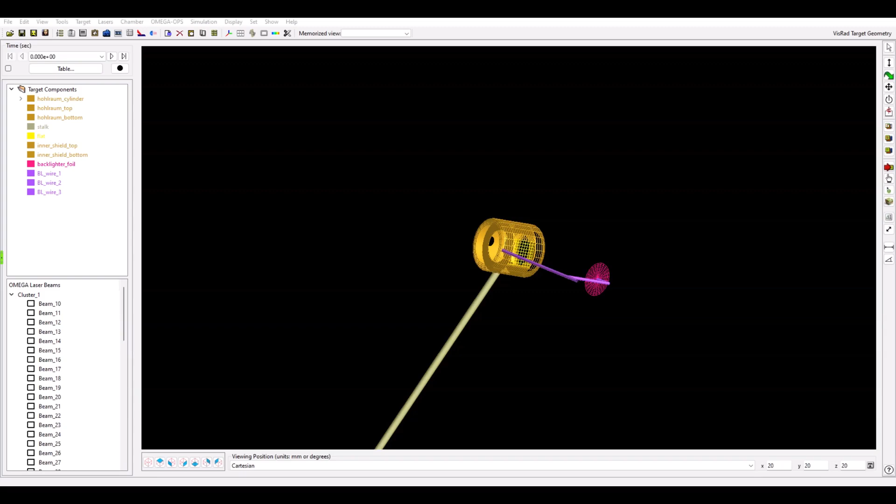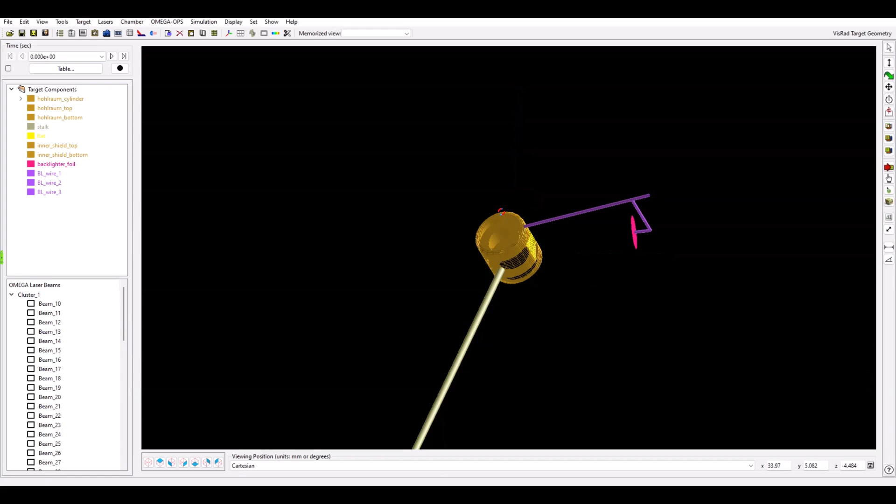Now, before we start the build process, let's take a quick look at the target system we'll be building. If you have a history with inertial fusion experiments, I'm sure you'll recognize this setup. But for those of you who are new, this center chamber we see here is what's known as a hohlraum. Hohlraums are a common structure used in inertial fusion and high energy density physics experiments. Their purpose is to essentially convert laser energy into X-rays, which will indirectly heat the contents of the hohlraum.

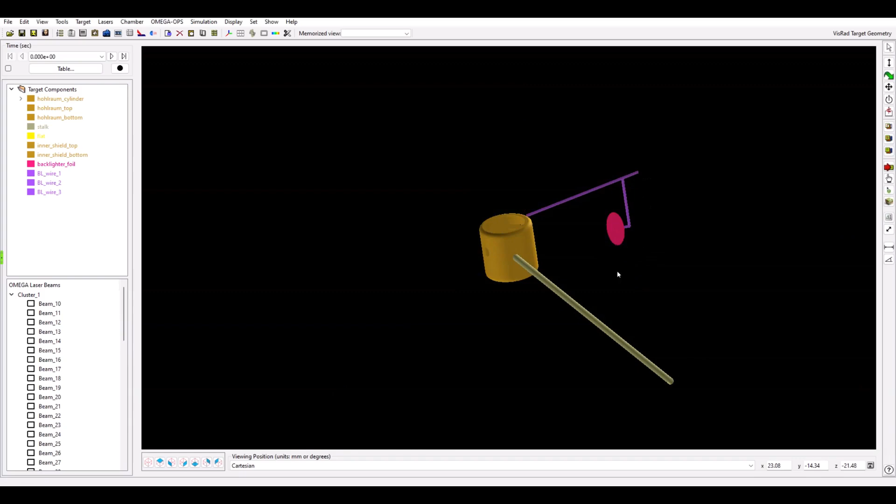Now, to highlight a few things, let's switch over to the solid frame view. That's the third viewing option over here to the right. This will just make all of our wireframes nice and solid and opaque. So when we look at this target system, we can see this wire jutting out with this disc connected to the wire, which is aimed at some kind of square and a hole. So what's going on here?

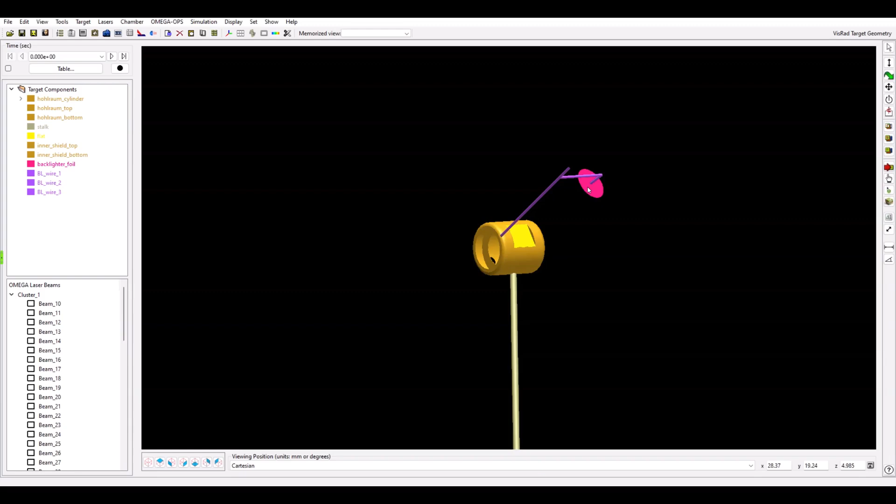Well, the square packet we see here is actually our material sample of interest. This is what our hohlraum is set up to heat. The disk in front of our sample material is the backlighter, which will also be heated by lasers to produce X-rays. These X-rays will hit our heated sample and then can be observed through this diagnostic hole on the other side of the hohlraum. This would let experimentalists get different opacity information on our sample material.

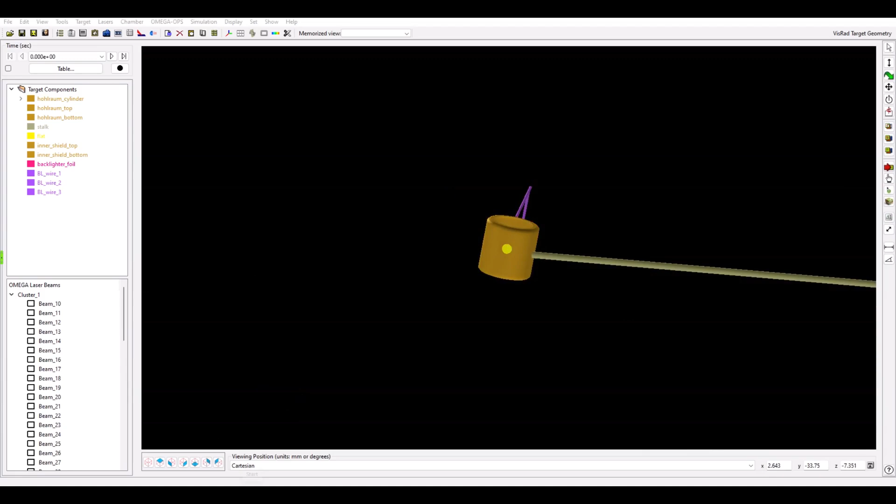The key thing to notice here is that the diagnostic hole, our sample material, and the backlighter all need to line up along a single line of sight. We can also see two washer-like structures on the inside of our hohlraum. These are basically just shields set up to help guarantee whatever signal reaches our diagnostic hole is coming from our sample and not elsewhere in the chamber or elsewhere in the hohlraum.

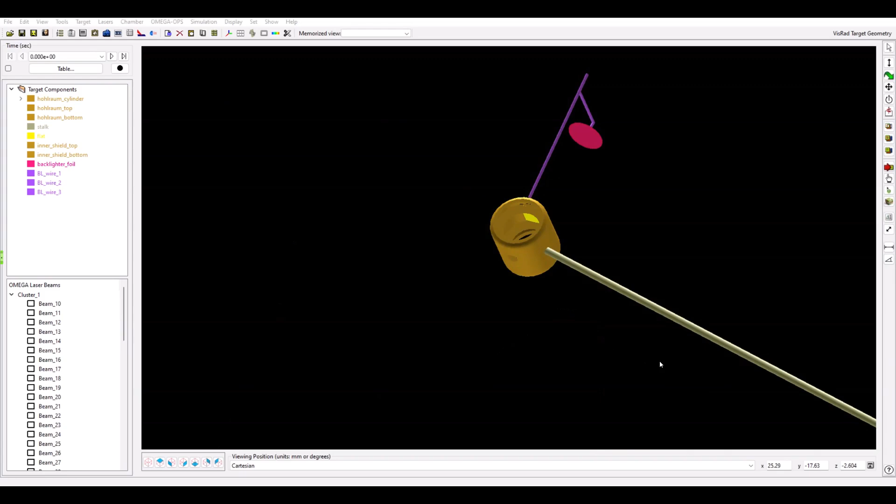Finally, we see a long cylinder connecting to our hohlraum. This cylinder is what's referred to as a stalk. Stalks are actually a fairly important component to designing a VisRad target system, and the topic of adding a stalk will be its own video later on. Now that we've gone over the end goal of our target system, it's time to open a fresh VisRad workspace, and we'll start the build process.

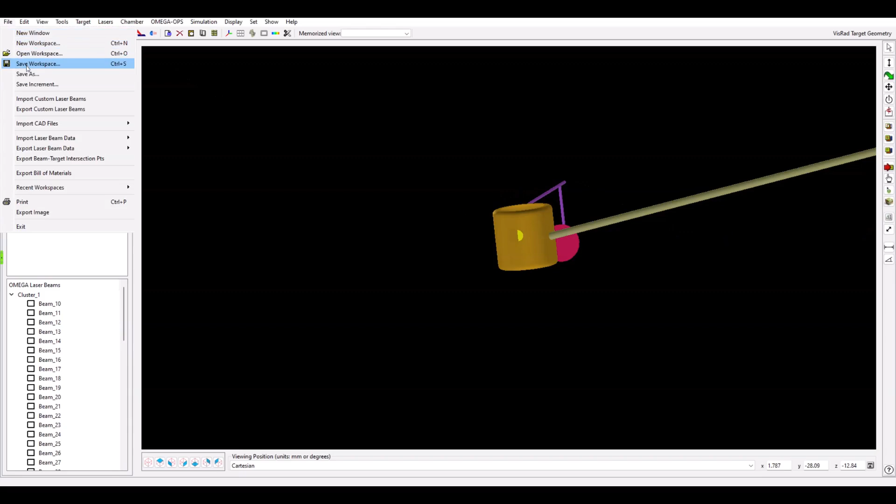With our fresh VisRad workspace, we'll need to select a target chamber. And for us, that's the Omega chamber. So let's start out with adding our hohlraum. Luckily for us, if we go to Target, Add Object, we can see cylindrical hohlraums are a primitive object that we can actually start with. After selecting the cylindrical hohlraum, the Object Parameters dialog will pop up. This is where we'll set our sizing and positioning information for our hohlraum.

First, let's go ahead and change our target object name to just hohlraum. And we can see that the first tab that our dialog opens to is the Position tab. This is where we'll set our object's position in the chamber as well as its orientation. For now, let's leave the default values here and come back to them in a moment. Let's go to the Size and Gridding tab. This second tab is where we can set up the dimensions of our hohlraum.

For this example, we'll be using a radius of 0.8, a length of 1.6, an LEH radius of 0.6, and an R corner of 0.1. These will basically just set our shaping parameters of our hohlraum to be a nice basic hohlraum shape for what we want. If we want to add more resolution to our object, we can choose to add more grid points over here to the right, but for now, the resolution here is totally fine.

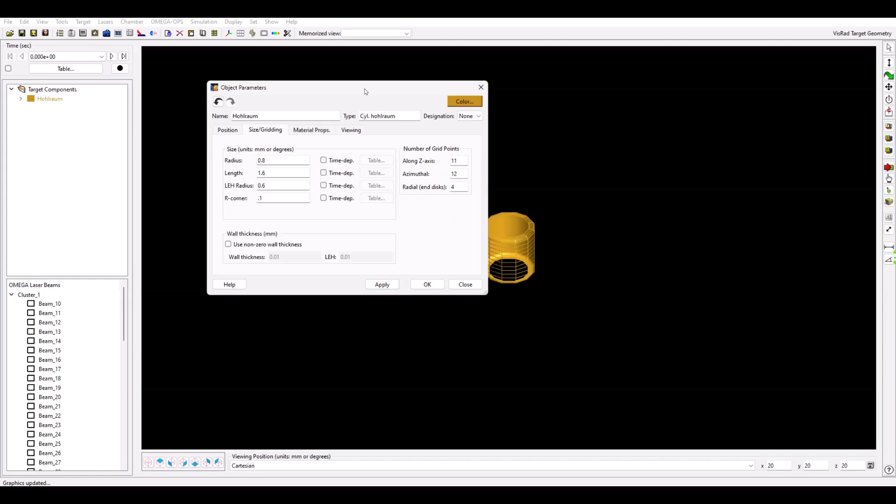If we click the Apply button and move our dialog a little bit, we can see our basic hohlraum appear in the target chamber viewer. Now that we have a properly shaped hohlraum, we can worry about its orientation.

Let's click back to the first tab, the Position tab, and now we'll need to choose a reference coordinate system. We have three options to choose from to define our reference coordinate system. The first one is the target chamber or mount. We can basically use the reference coordinate system of the target chamber or some preset mounting ports.

The second option is the target component option. This would be a drop-down of all the different target components. So we could use the reference system of, say, some cube up here to the right. We don't have any other target components in our system, so this is grayed out.

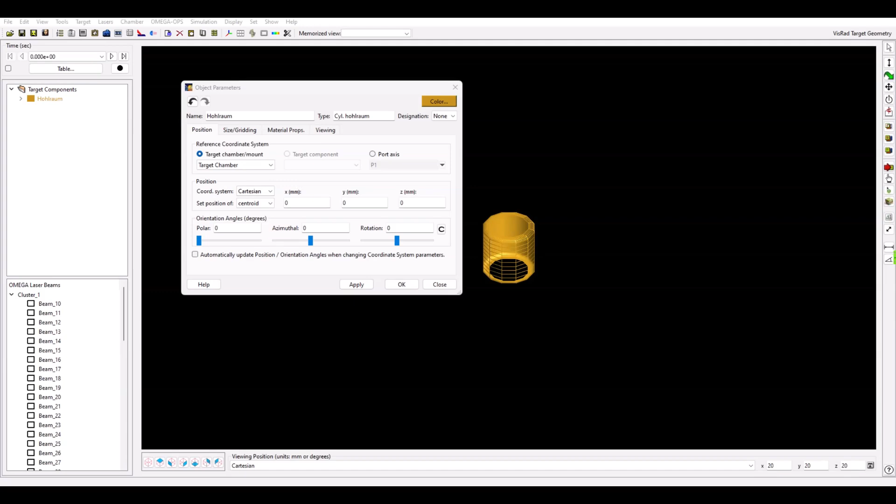And finally, the third option is the option to use a port-aligned coordinate system. Port refers to the diagnostic ports set up within a facility. Much like lasers, VisRad comes with these ports already modeled and set up. To see a list of these ports, we can go to View and then select the Port Positions dialog.

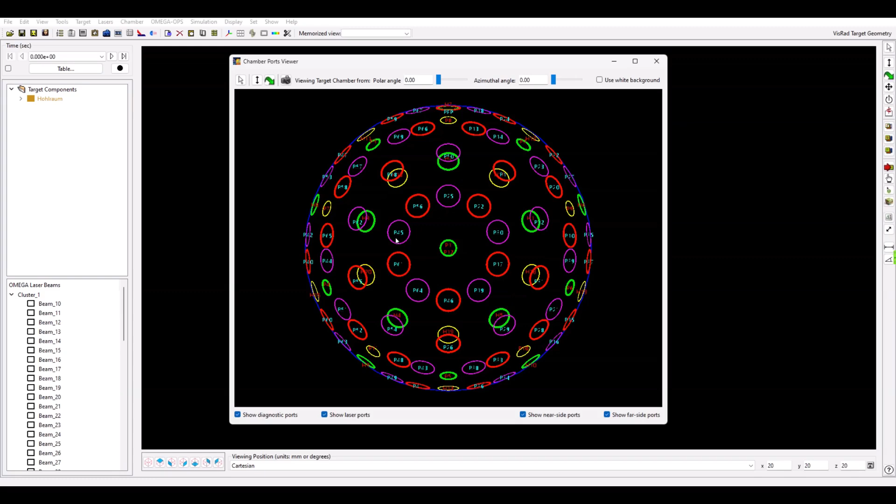This will give you the orientation of each port relative to the chamber, as well as their assignment at the facility. If you would like a visual, you can also open the port viewer and see how all these ports are laid out. For us, we'll go ahead and choose to align our hohlraum with port P6.

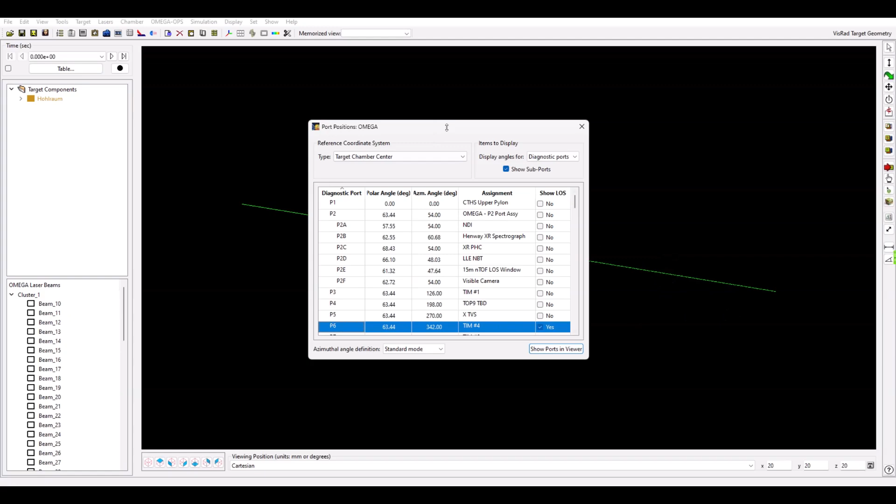To see the line of sight of this port, we can actually toggle it on and off over here with the Show Line of Sight option. You can see it pop up in the chamber behind us. I'll move this so we can see a little better. And now we want to adjust the orientation of our hohlraum so it lines up with this line of sight. I'll close this and go back to our hohlraum object information.

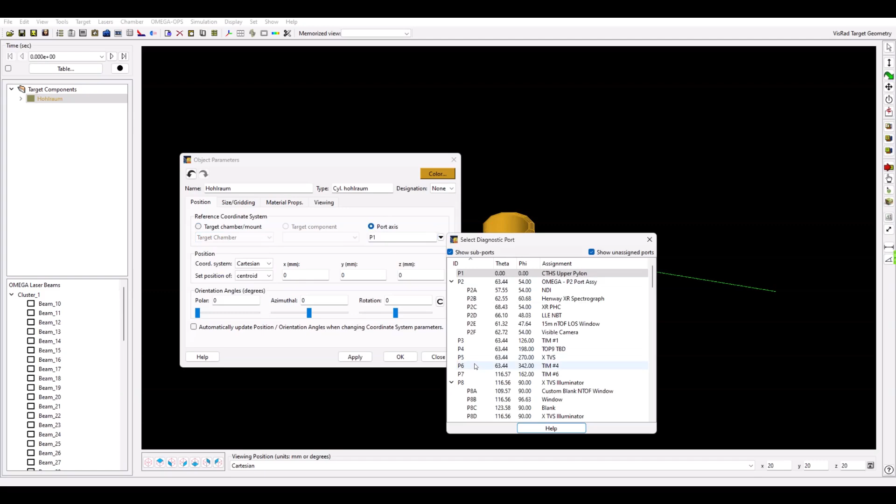And we have two options here. We can go to the port axis and choose P6. But also it's good to note that port P6 corresponds to TIM4, which is also in our first mounting reference coordinate system. So you can really use either. I'll just use the port P6 option over here because I'll refer to this as P6 quite a bit coming up. So now if we hit apply, we can see our hohlraum lines up perfectly with the port P6 line of sight.

The rest of the information in this object parameters dialog doesn't really need to be altered for us. This center section sets the centroid of our hohlraum, and we're okay with that being at the 0,0,0 point of our target chamber. And the third section down here sets the orientation angle offset.

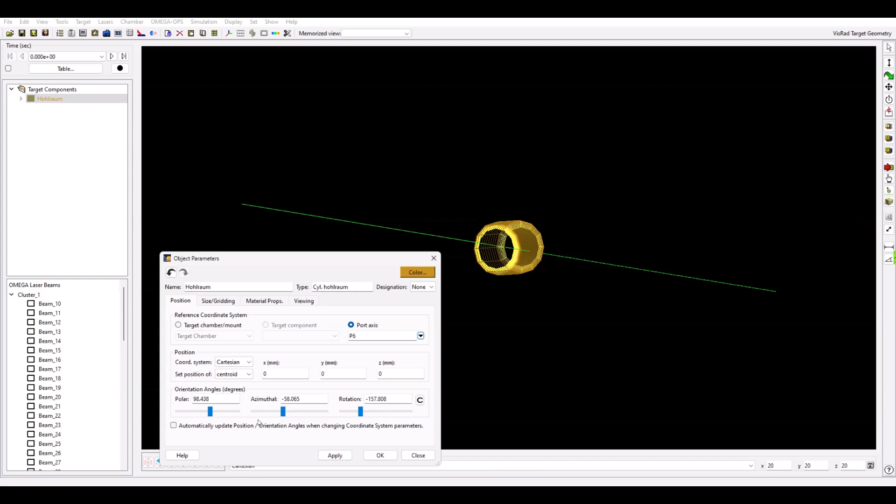We're already lined up with port P6, but if we want to deviate from that a little bit, we could rotate away from the default port P6 using these. But for us, we can just set them all to 0 because we're already lined up with port P6. And with that, our basic hohlraum is basically all done.

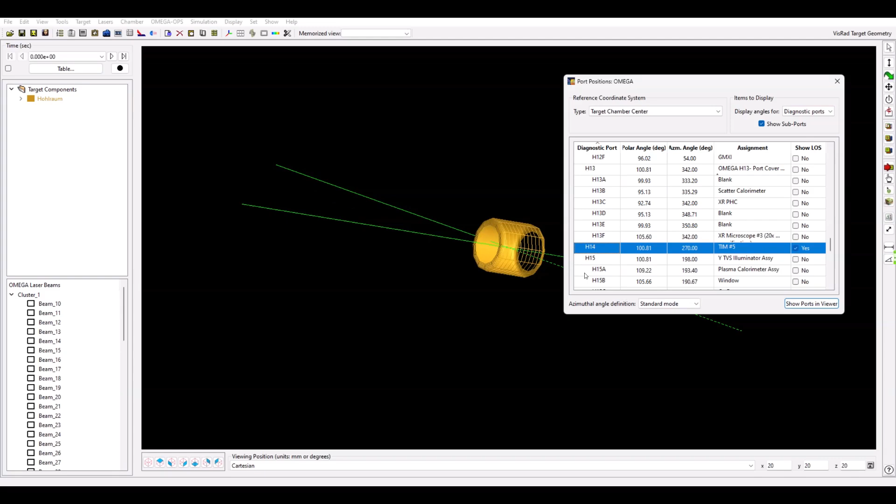Since we were just looking at ports and lines of sight, let's go ahead and set up our line of sight for the diagnostic hole, square sample material, and backlighter lineup that we just talked about. We'll go ahead and reopen the port positions. And for this setup, we want all three objects to line up with port H14 for our example. So we'll go ahead and turn on this line of sight as well. This will be the line of sight leading directly into the side of our hohlraum. I'll go ahead and close this again.

And now we can add the easiest of these three features, the backlighter. To do this, we'll go to Target, Add Object, and we're going to use a disk as a backlighter. We'll label this as backlighter. And now we'll go to the Size and Gridding tab and give this backlighter a radius of 0.5.

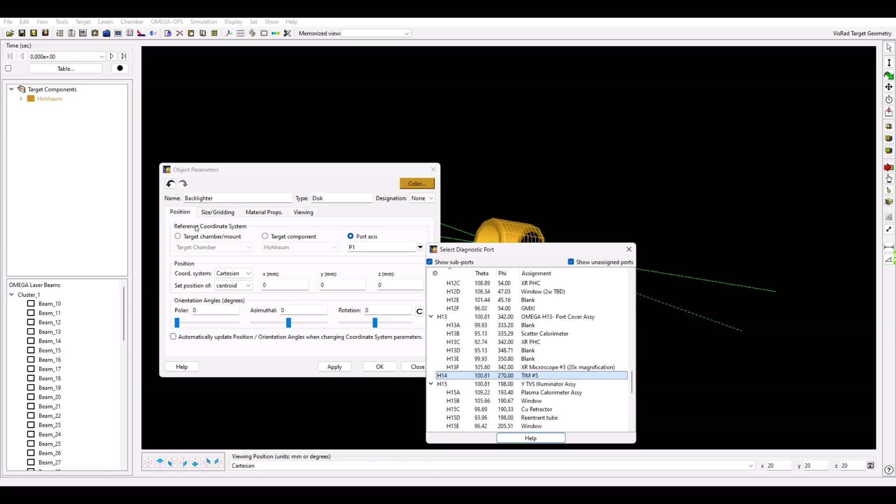Now, how do we line this backlighter up with our new line of sight? Well, let's go back to the Position tab and we can choose port H14 from our list of ports for our reference coordinate system. Just double click it. We can hit apply and we can see a disk appear at the center of our hohlraum. And we want to shift this a little bit down. So I'll set this to a Z value of negative 3.5, hit apply.

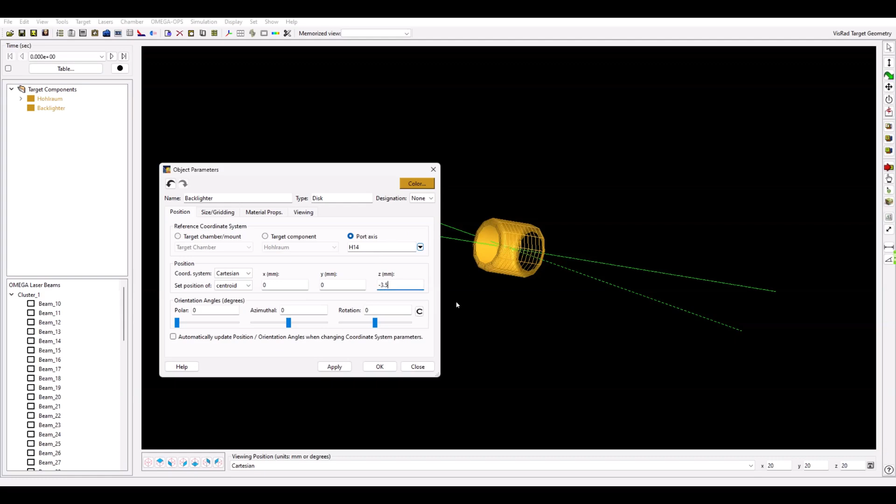And now we can see our backlighter is set down our H14 line of sight. And now we can go ahead and add our shields. To do that, we can just go to Target, Add Object, and choose a disk.

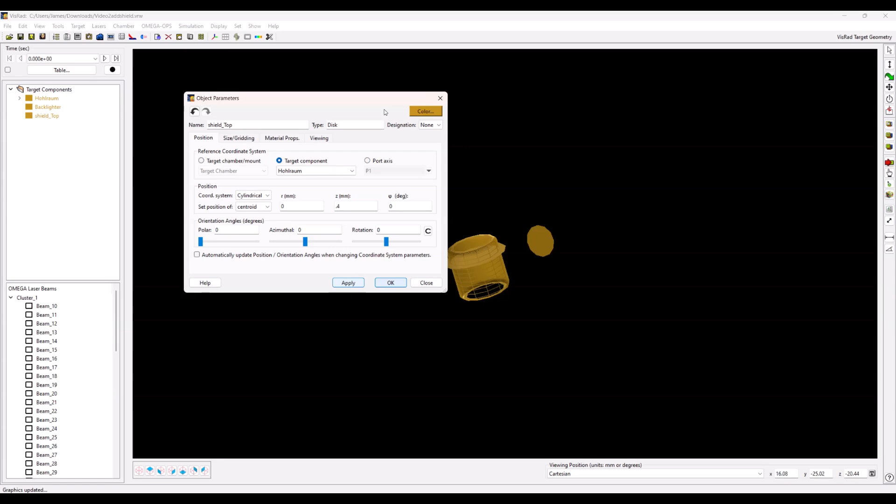I'll name this disk shield_top. And we'll want to be in the reference coordinate system of our hohlraum. And we're going to be using cylindrical coordinates again. And now we want to position the shield right at the top of our material sample, which will have a height of 0.8 millimeters. So I'm going to set our Z to 0.4 millimeters. If I hit apply, we can see our top shield appear in the target viewer.

Now it's looking a little low resolution along the edges. So what I'll do is I'll actually just increase the grid points to 30. Hit apply, and we can see it smooths out much more into a clean disk. And while I'm at it, I'll just go ahead and adjust the hohlraum to 30 grid points in the azimuthal as well. And you can see this smooth out as I do it.

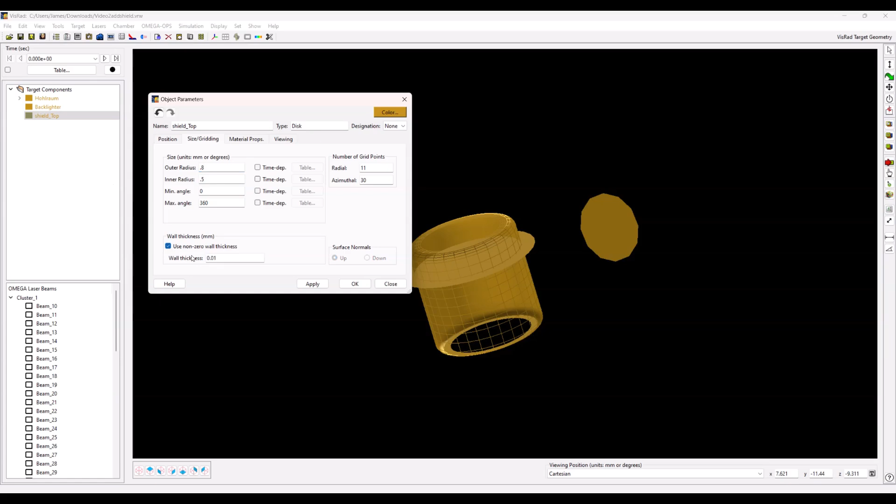And now for shaping the disk, we will set the outer radius to 0.8 millimeters, which is the radius of our hohlraum. For an inner radius, we'll just use 0.5 millimeters, and we'll use a wall thickness of 0.01. And there's our top shield.

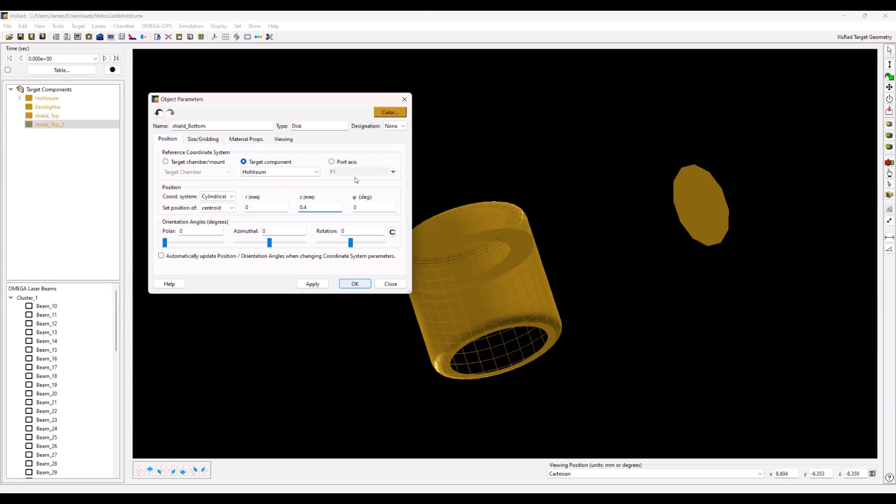For the bottom shield, we could just redo all of this, but instead we can just right-click on the top shield, say duplicate, edit the duplication, and change its name to bottom shield. And we'll just set the Z to negative 0.4, which will be the bottom of our material sample. And with that, both of our shields are now in place.

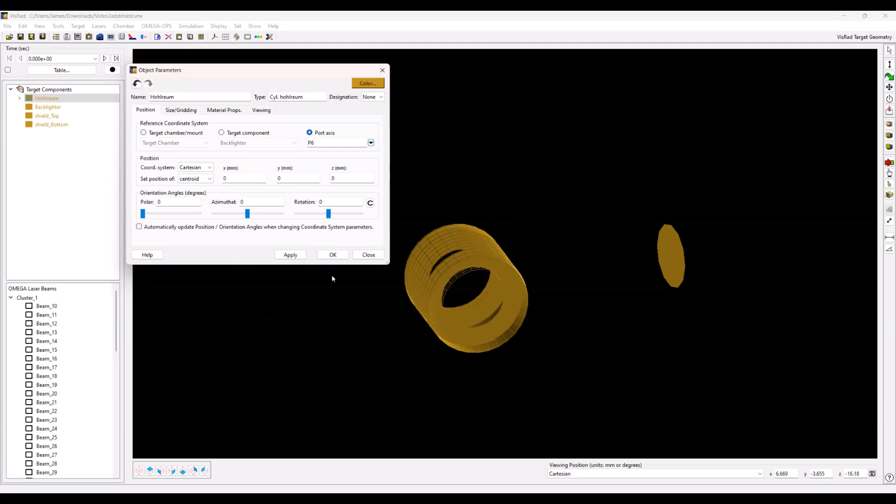And now to end the video, I want to go over a few key things to remember when you're constructing target components. Let's say I wanted to move our hohlraum up in Z in the reference system of our target chamber, but maintain its P6 orientation. Well, if I were to just switch to the reference coordinate system of our target chamber and hit apply, you see our hohlraum readjust itself to line up with the target chamber, and we don't want that. Let me just go back to P6 quick to go back to what we were at.

Now, how do I move this in the reference coordinate system of the target chamber while maintaining its orientation? Well, there's this little checkbox down here, automatically update position/orientation angles when changing coordinate system parameters. Now, if I switch to the reference coordinate system of the target chamber, we can see the orientation angles automatically adjust to maintain the target component's orientation through the reference coordinate system change. Now I can move the hohlraum up in Z or anywhere I want in the chamber.

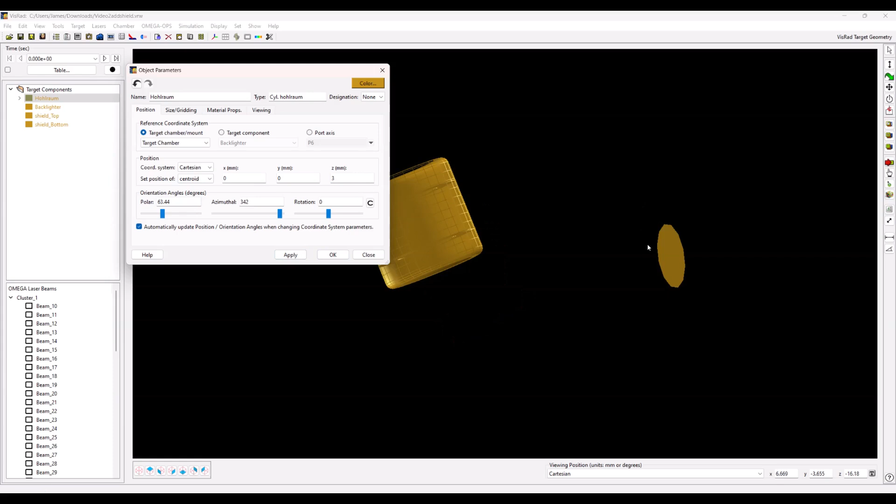But notice when I move the hohlraum, the backlighter didn't move with it. Well, if I look at the object parameters of the backlighter, we can see we're in the reference coordinate system of port H14. If you want to check all of these all at once, you can just go to Target, Show Reference Coordinate System Tree to see all of your target components' references. And here we can see the shields are in the reference coordinate system of the hohlraum, which is referencing the target chamber, but our backlighter is in a completely different branch, referencing port H14.

So if I open the object parameters of our backlighter, make sure our automatic update checkbox is on, and switch to the reference coordinate system of our hohlraum and say OK, we can look at our tree and we can see now all of our target components are in the same branch. The backlighter and shields are referencing the hohlraum, which references the target chamber. And that means if I move the hohlraum, the shields and backlighter will move with it. And indeed, if I move our hohlraum up in Z in the target chamber, the backlighter moved with it.

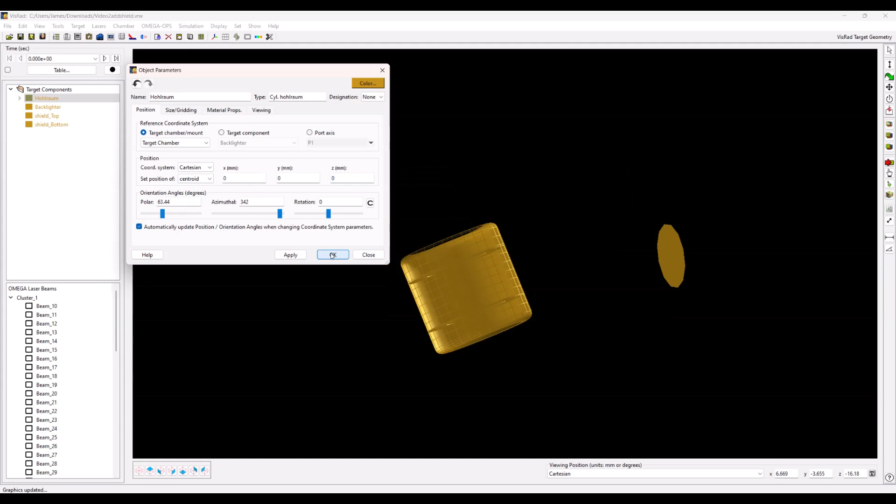And with that, we're at the end of this section of the video. In the next section, I'll be going over how to clip out segments of our hohlraum to add our diagnostic hole and material sample.